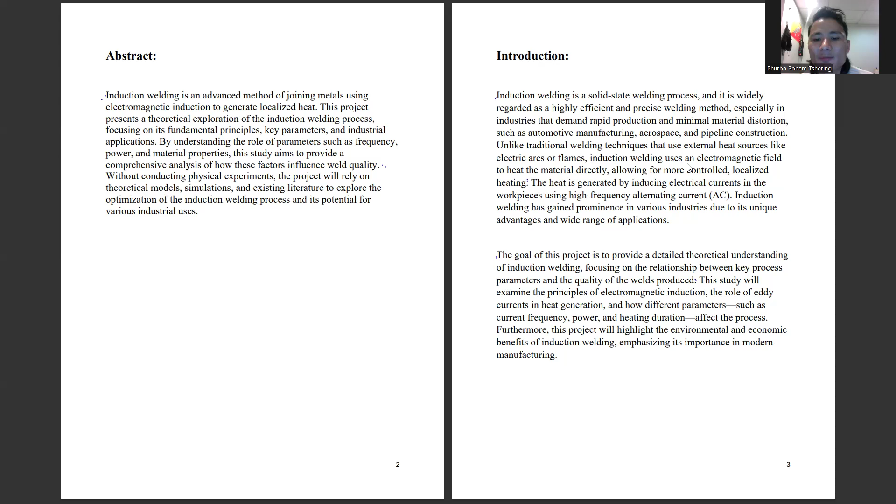The objectives: number one, to understand the basic principles of induction welding. Second, to analyze key parameters influencing the induction welding process. Third, to explore theoretical models. Fourth, to examine the industrial applications and advantages. Fifth, to evaluate environmental and economic impacts.

The literature review. Induction welding is a growing area of interest due to its potential to improve the efficiency and quality of welding processes. The literature on induction welding highlights its ability to produce strong, reliable welds while reducing energy consumption and material waste. Studies have shown that the use of electromagnetic induction allows for the rapid heating of conductive materials, making it suitable for high-speed continuous welding operations.

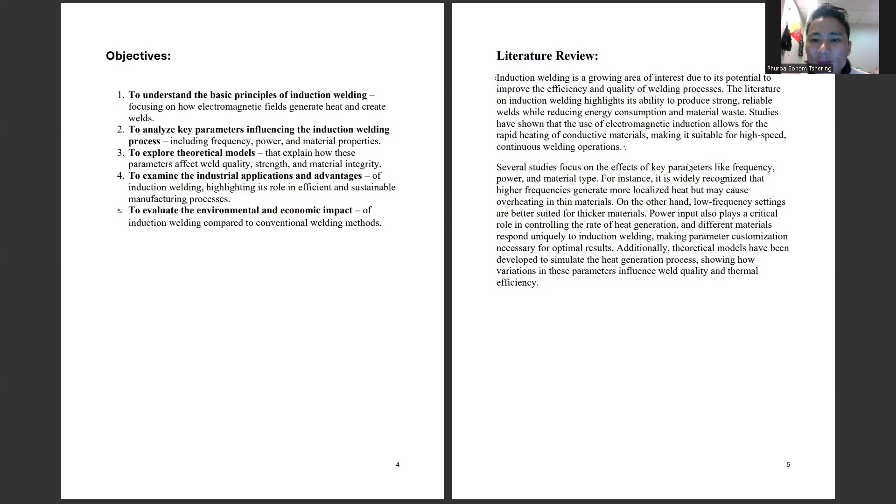Theoretical backgrounds. Number one, principle of electromagnetic induction. Induction welding is based on Faraday's law of electromagnetic induction, which states that a changing magnetic field induces an electrical current in a conductor. Number two, role of eddy currents in heat generation. The primary mechanism for heat generation in induction welding is the formation of eddy currents.

Third, heat distribution and localization. One of the important aspects of induction welding is the ability to localize the heating process. Unlike traditional methods that heat the entire workpiece, induction welding heats only the area near the weld joints.

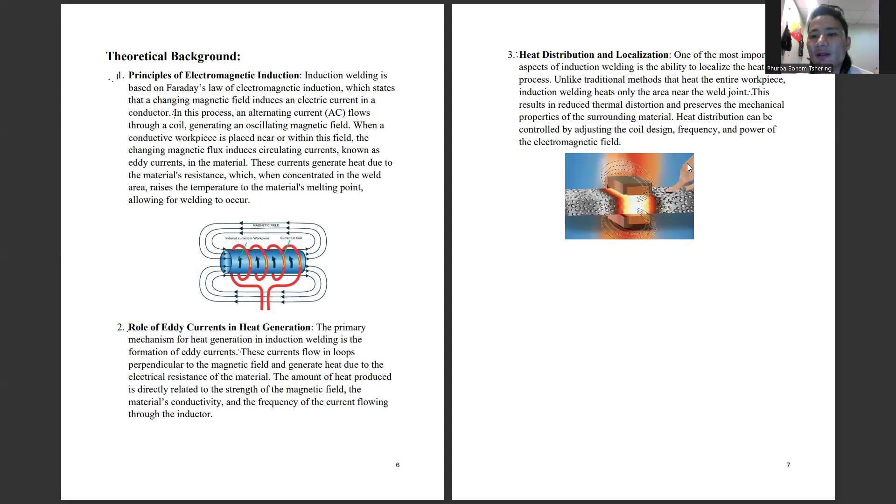Principle of induction welding. The basic principle of induction welding can be summarized as follows. The workpieces to be welded are placed near each other. Second, an induction coil, typically made of copper or another conductive metal, is wrapped around one of the workpieces or positioned adjacent to the joint area.

Third, high-frequency alternating current is passed. Fourth, the alternating magnetic field induces electrical currents. Fifth, the eddy currents generate resistive heating in the workpiece. Sixth, the resistive heating raises the temperature of the workpieces at the joint interface, causing the metal to soften and eventually melt. Seventh, pressure is applied to the softened material, forging a bond between the workpieces as they cool and solidify.

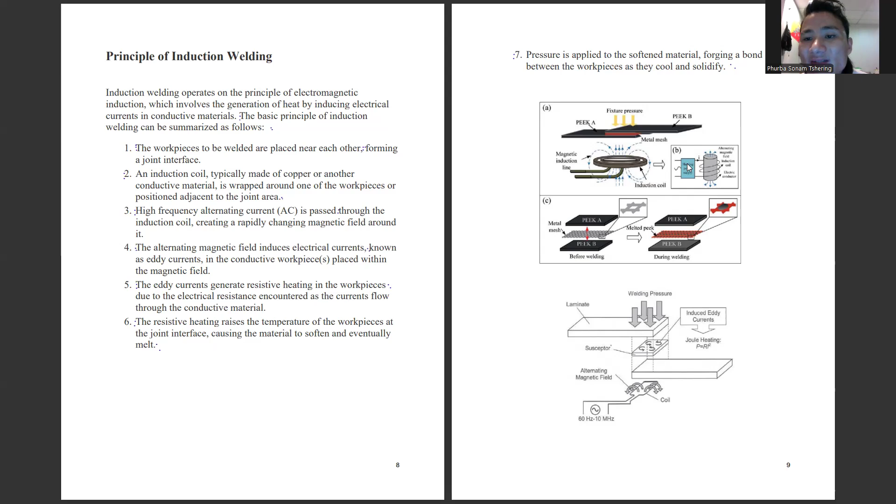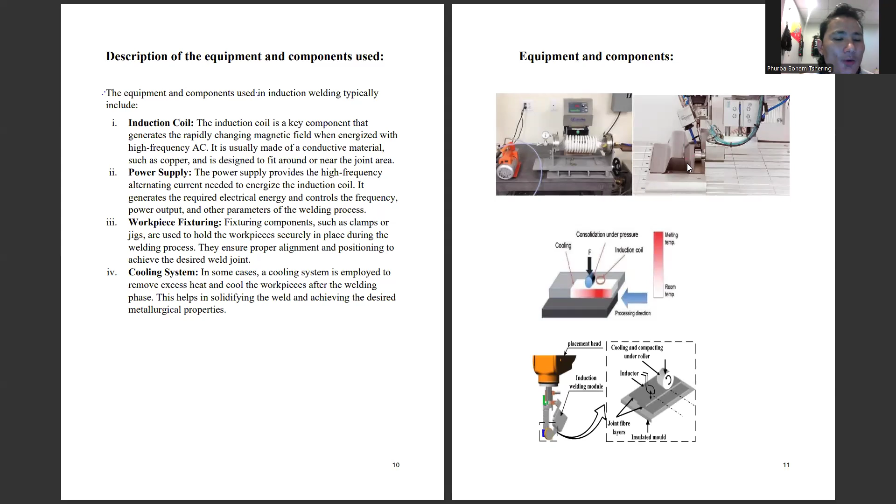Now the description of equipment and components used. The components used are induction coil, power supply, workpiece fixturing, and cooling systems.

Key parameters in induction welding. Number one, frequency of alternating current. High frequencies generate more localized heat but may result in surface overheating, especially in thin materials. Low frequencies penetrate deeper into the material and are more effective for welding thicker sections.

Second, power inputs. Higher power inputs produce more heat, allowing for faster welding speeds. Third, material conductivity. Highly conductive materials like copper and aluminum respond more quickly to the electromagnetic field and require lower power input to reach the desired temperature. Fourth, inductor coil design. The design of the inductor coil - its shape, size, and number of turns - significantly influences the strength and concentration of the electromagnetic field.

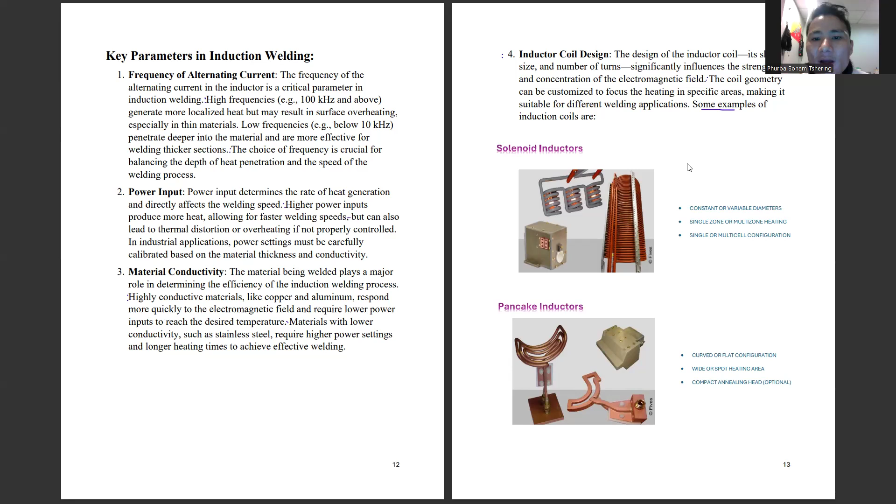Some examples are solenoid inductors, pancake inductors, tunnel inductors, and specialized ones, which are produced based on our needs and the applications intended.

Now the process steps. Firstly, the pre-welding preparation. Number one, selection of suitable materials for induction welding. Second, surface preparation and cleaning of the workpiece. Third, fixturing and alignment of the components.

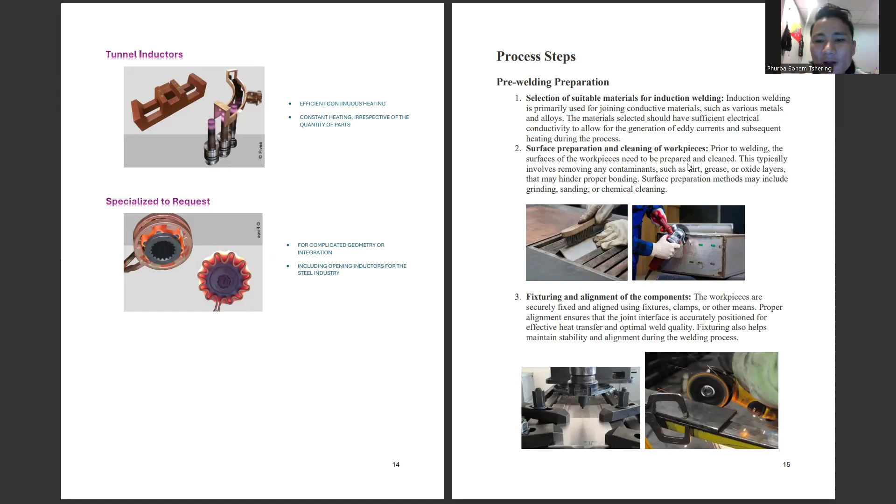Now the heating phase. Number one, activation of the equipment and setup of welding parameters. Second, the introduction of high frequency alternating current. Third, electromagnetic induction and heating of the workpiece.

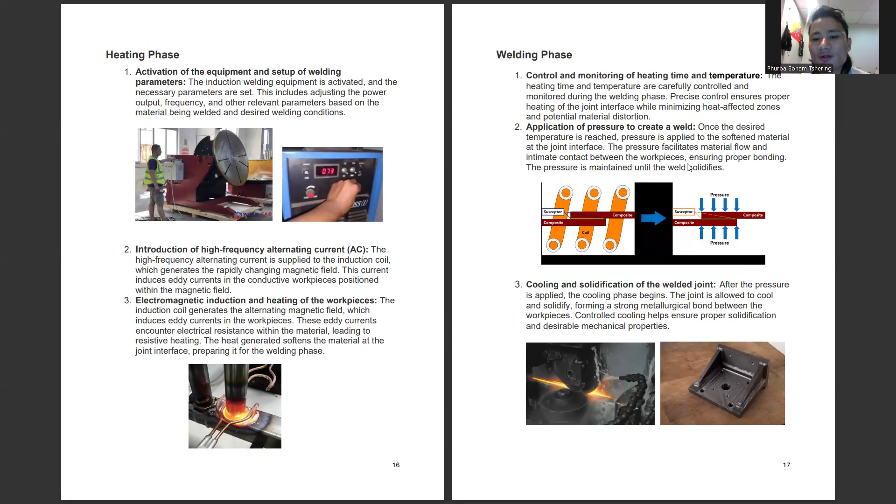In the welding phase, number one, control and monitoring of the heating time and temperature. Second, application of pressure to create a weld. Third, cooling and solidification of the welded joint.

Post-welding. Number one, inspection and testing of the weld quality. Second, post-weld processing or finishing.

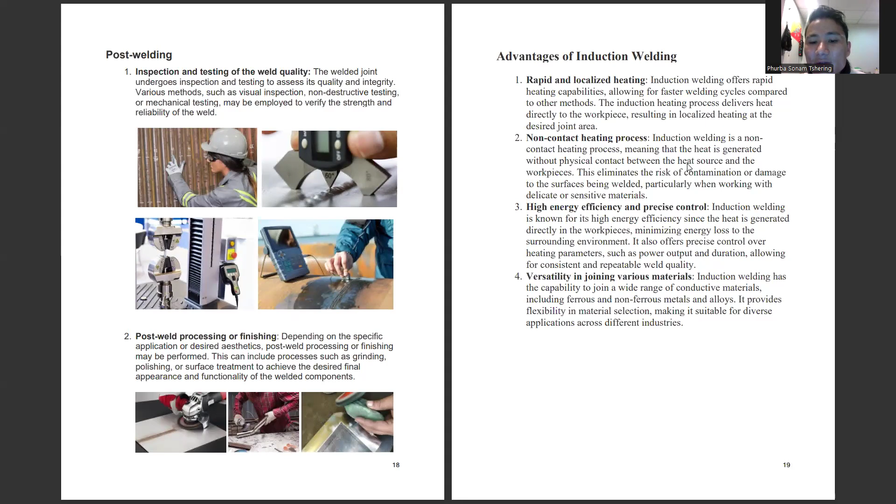The advantages of induction welding. Number one, rapid and localized heating. Second, non-contact heating process. Third, high energy efficiency and precise control. Fourth, versatility in joining various materials.

Limitations and considerations. Number one, material compatibility and electrical conductivity. Second, surface finish and cleanliness requirements. Third, equipment costs and complexities.

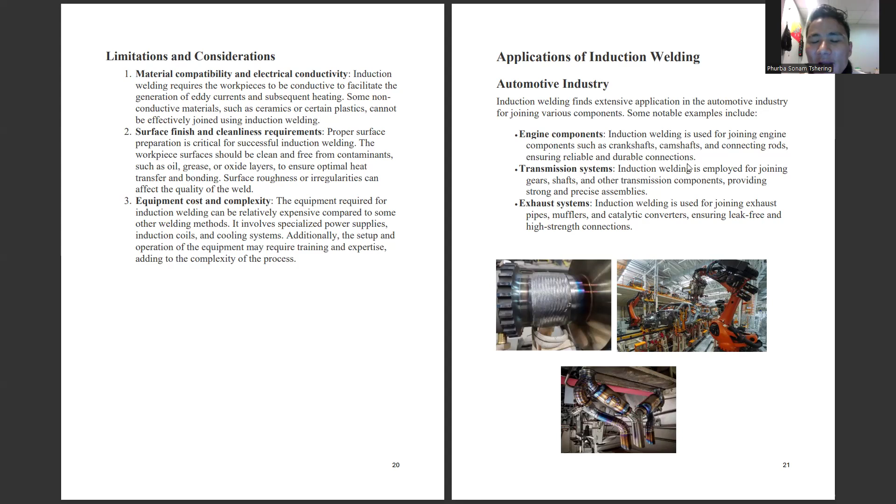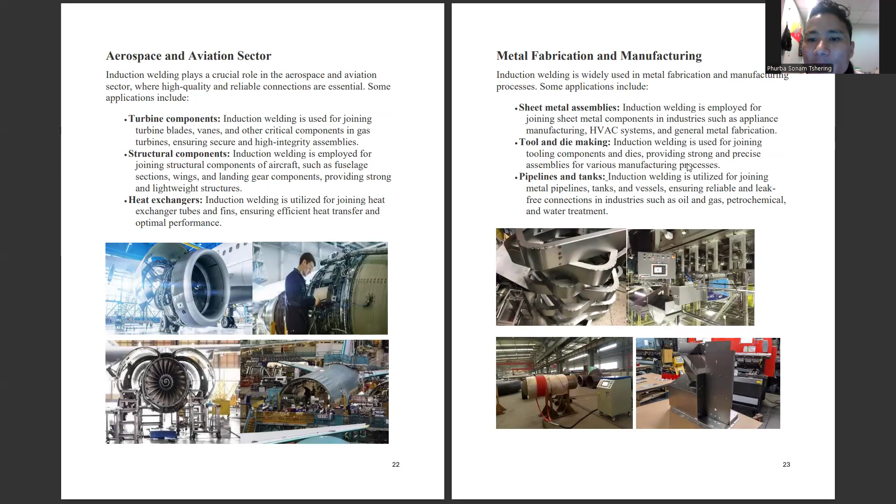Now, the applications of induction welding: firstly in automotive industries, like in engine components, transmission systems, and exhaust systems. It's also used in aerospace and aviation sectors, like turbine components, structural components, and heat exchangers. And it's also used in metal fabrication and manufacturing, like sheet metal assemblies, tool and die making, and pipelines and tanks. It's also used in pipe and tube welding, like longitudinal pipe welding, tube welding, and pipe and tube fittings.

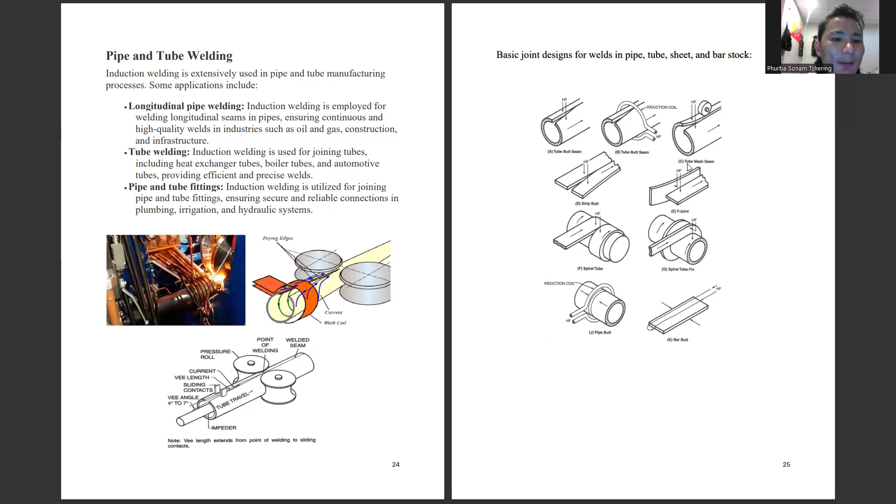Other industrial sectors also use induction welding, like power generation, electrical and electronics manufacturing, rail and transportation, and renewable energies, etc. Environmental and economic impacts.

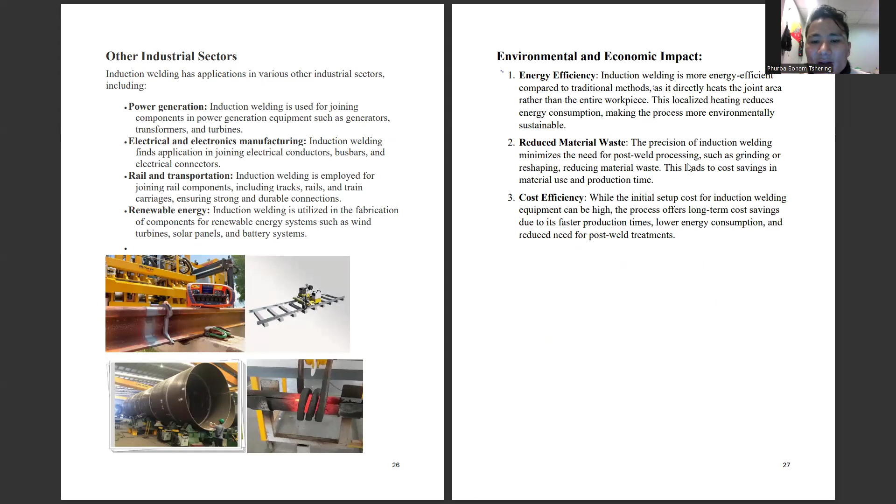Number one, energy efficiency. Second, it reduces material waste, and third, it's also cost efficient.

Now, finally, the conclusion. In conclusion, induction welding is a highly efficient and versatile welding technique that offers numerous advantages in various industries. By utilizing electromagnetic induction, this process generates localized heat in a fast and precise manner, resulting in strong and reliable welds. One of the key benefits of induction welding is its ability to join dissimilar materials, including metals and thermoplastics, overcoming the limitations of conventional welding methods.

The non-contact nature of the induction heating process allows for precise heating applications, minimizing the risk of damage to surrounding areas. Compared to traditional welding techniques, it produces minimal fumes, emissions, and waste, contributing to a cleaner and safer working environment.

While induction welding has proven its effectiveness in various applications, it is essential to consider factors such as material compatibility, design considerations, and equipment selection to ensure optimal results.